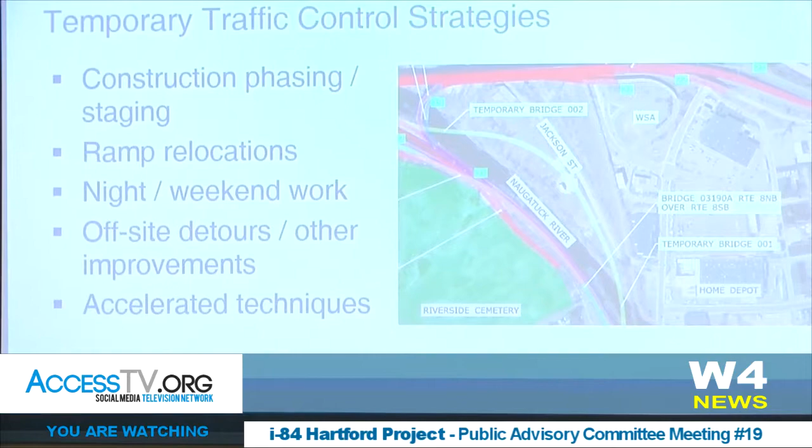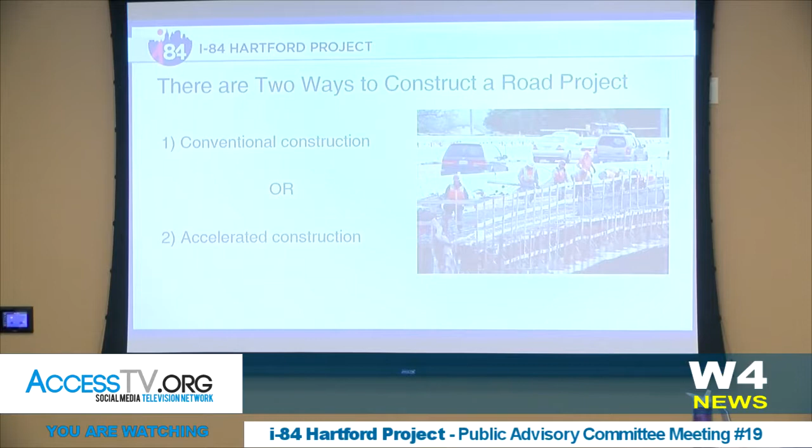And when we talk about how things are built, I'll throw out terms at you: conventional versus accelerated construction. In reality, this project will end up being built as really a mix of both. Conventional construction talks about maintaining all the lanes of traffic, moving traffic over a little bit, building a little bit more. It typically ends up with a longer duration, and can involve lots of temporary roadways or temporary structures, which can add to the construction cost.

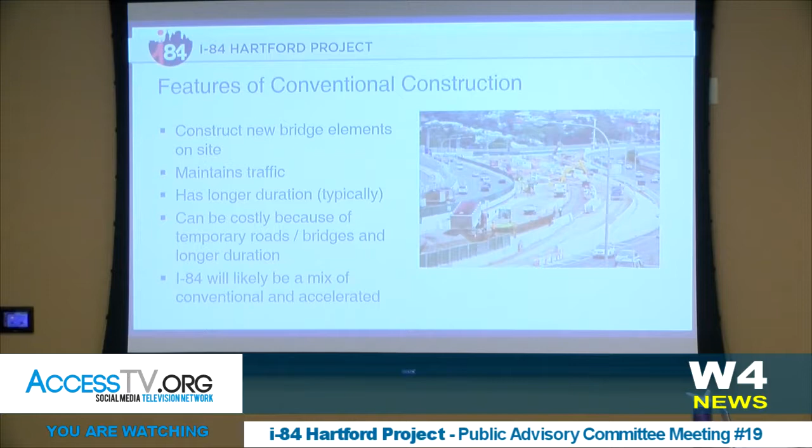Now again, I-84 will likely be a mix of that with some accelerated portions as well. There are examples of some recent significant projects around the Northeast done in that same manner - mostly conventional with some accelerated pieces. Many of you are probably familiar with the Q Bridge down in New Haven, the recently completed Waterbury widening on I-84, and of course the Central Artery, where they took down an elevated urban viaduct like we're dealing with here in Hartford.

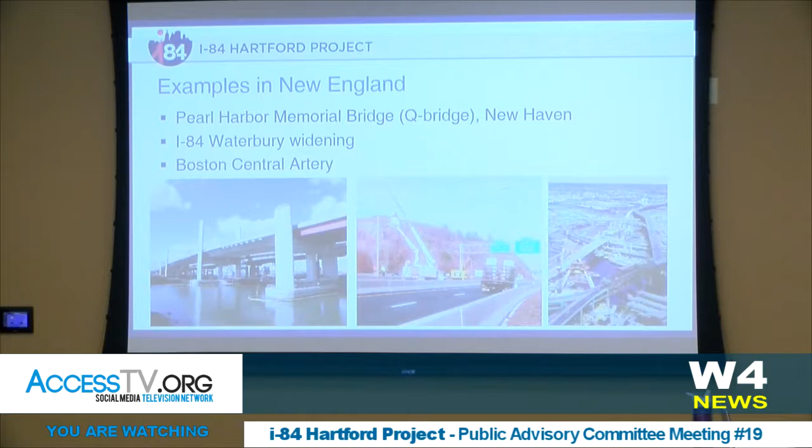So I'm going to walk through one scenario for how we could construct this lowered highway alternative we've been talking about for the last few years. It will all really start with the relocation of CTfastrak and, most importantly, the railroad - that's the thing that allows us to lower the highway to the low grade, passing beneath all those city streets.

In many places, we will utilize what we call offline construction - that's where we build the new highway outside the footprint of the existing facility. But this will have a lot of additional engineering and analysis throughout the design phase as we get towards construction. So I'm going to go to the next slide - it's a map with a lot of colors and lines. There's not a test later.

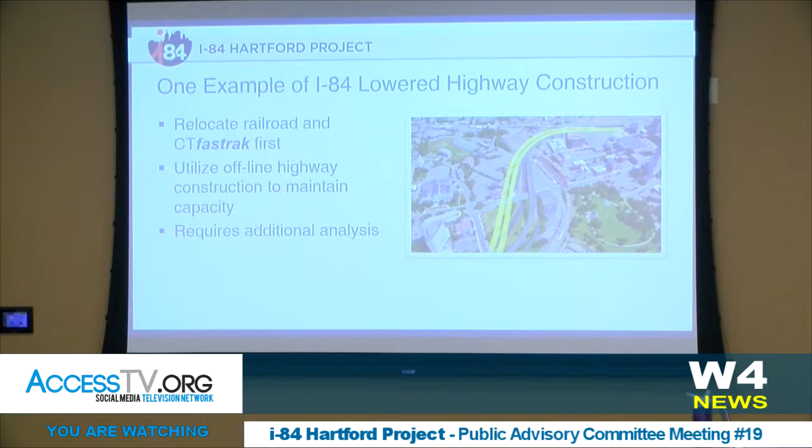So what I'm gonna do is explain the legend, but I'll pick out one key point for each phase and point you to something we think is interesting as we move through the various phases. I don't expect everyone to grasp every detail, so again, we're just highlighting here. I'm gonna pull up the laser pointer so you can see.

So that first phase is really focused on constructing the railroad, constructing CTfastrak, getting those online so that they're utilized during construction to minimize the number of single occupant vehicle trips. This phase does include some local road work and I-84 work in the eastern part of the project.

What I'm going to do for each of these is summarize at a high level the work going on, then show you where I-84 traffic would be. For this first phase, I-84 traffic would be unchanged. You would follow your way through existing I-84 eastbound, and coming away from the I-91 interchange, go under Asylum like you do today, under Broad, and come around on the viaduct. So no changes there. Where there would be a change with the construction of the railroad would be, in particular, for Capitol Avenue, a local road in the western part of the corridor.

The reason is it would be impacted by the railroad construction. So I'm going to show you a couple images just to convey why.

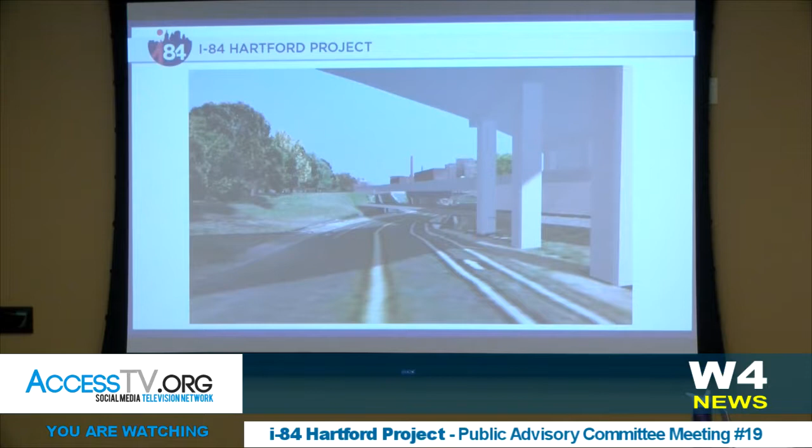So we're really talking about ensuring west to east mobility is maintained, and through these temporary roads we'd offer folks a couple different ways to get into and out of the city. There's certainly additional work to be done looking at the various intersections it impacts, but generally speaking, we're looking to provide for that capacity elsewhere as we construct these temporary roads.

So as we culminate this phase, that phase 1 we expect to take in the vicinity of about 4 years. Given the length of the railroad construction, the follow-on phases are a little shorter, comprising mostly highway work, maybe 1 to 2 construction seasons each.

So I'm going to flip back to the next stage and go back and forth once or twice to show you what we're doing. Phase 2 really focuses on constructing a big chunk of I-84 here in the western part, and then the local road network in Asylum Hill. If I flip back one more time, just to see what's going on there.

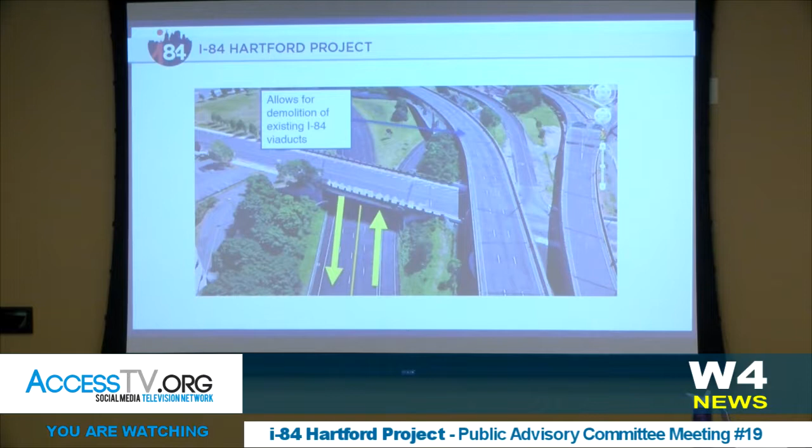The purpose for that is so we can start to demolish those big eastbound viaduct structures up here - this being the existing I-84 eastbound, and here's that off-ramp that goes to Capitol and Asylum. By demolishing those, we can start to build those new local roads in and around the Bushnell Park area.

So then we're kind of moving west, looking at this stretch really between Broad and Sigourney Streets, along with the local roads that cross in those areas. Again, you'll see as I animate this, there'll be some temporary roads in place to move the I-84 traffic out of the way so that we can build. If you keep your eye kind of here, you can see we've shifted things out of the way in order to be able to build that.

And then the last piece - that really completes the lower highway, the I-84 construction. So the final piece is ramp construction and completing Capitol Avenue and some of those local road overpasses, taking them out of their temporary detours or configurations and putting the final condition in place.

One of the things I'd point out here, and I'm going to talk a bit more about accelerated construction in the next couple slides, is that those Sigourney ramps are opportunities for us to look at accelerated construction. Right now your highways come down to Sigourney; in the future, you'll be down here coming up to Sigourney Street. Using some of these accelerated techniques will allow us to minimize any closures, whether during summer periods or over a weekend, to really expedite the time period and minimize disruption to traffic.

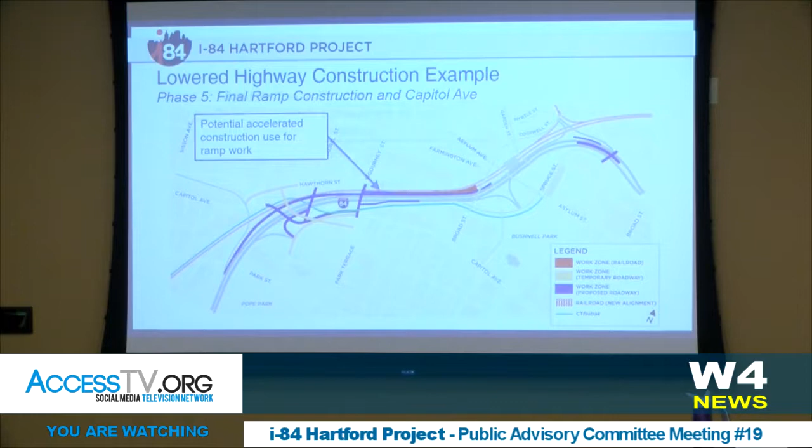So now our eastbound and westbound I-84 would be on their proposed final alignments. That'll be exciting.

So with that stage complete, we're essentially done with the construction of the lowered highway. Now what would follow would likely be some of these features that we talked about a lot. The capping would be constructed here at the end, and a potential multi-use path that essentially follows the busway on the south side of I-84 would be constructed then as well.

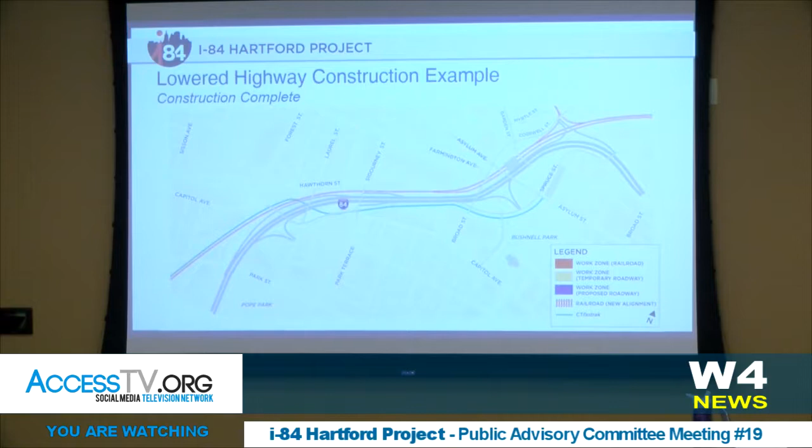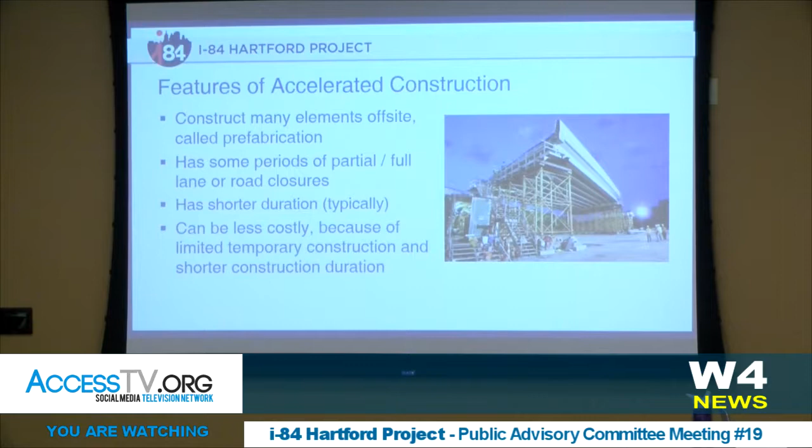Now in terms of accelerated construction, just to explain a little more for those who may not be familiar, this is where you really look to expedite the construction of certain features, including potentially partial or full road closures, to really let the contractor get in there and work a little quicker. It can be a bit less costly, but it can really help reduce the duration and the burden on the traveling public.

Some good examples here from around the state. Many of you may remember just a couple years ago they did I-84 down in Southington - that was the Marion Avenue bridge. My wife made fun of me because I went down from our house in Bristol to watch some of that.

And then there's also one going on right now, Route 1 in Stamford, as well as for those of you that drive on 91 through Rocky Hill, you'll see the bridge between exits 23 and 24.

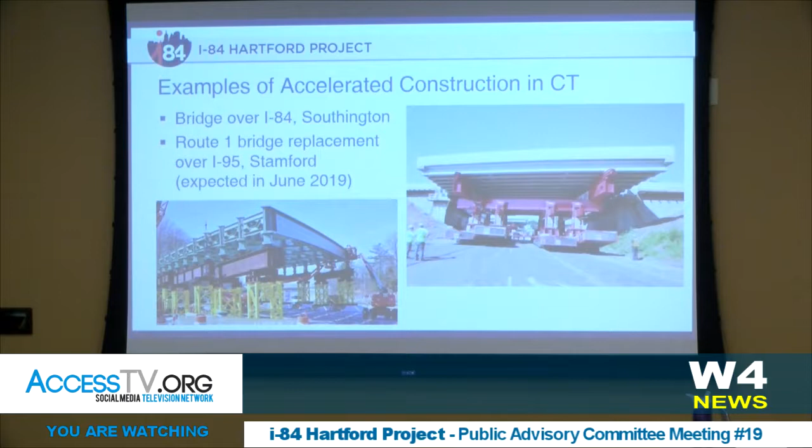So again, the summary for what I went through is really to drive home that we think we've identified a feasible, practicable way for this to be built. There's certainly still details to be worked out, and that will happen as we work with our new next generation traffic model that we've been coordinating with the city on developing. We'll use that to test these different phases and make sure we're adequately moving traffic around the city, using that mix of conventional and accelerated elements. We really feel this doesn't have to have a negative impact on the economy and the people of the city.

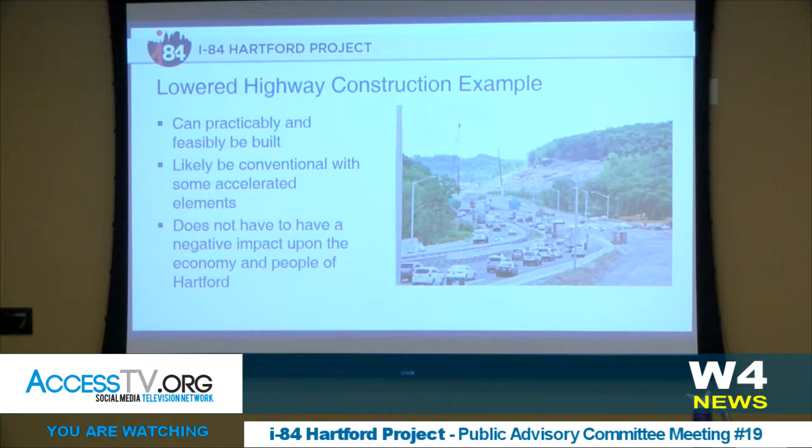To that end, we've worked with our partners at Federal Highway. Thanks again, Ted, for providing these. We have just a couple examples, and I think you guys have the printouts with all these links, so I won't go into every single case study we've done.

Just one good example of something that can come positively out of these projects is the I-80, the west approach of the Bay Bridge out in San Francisco. They did a big seismic refit and essentially had to reconstruct the whole thing in the aftermath of the Loma Prieta earthquake. That carried about 280,000 vehicles, well above what we did. They rebuilt it in place over the course of about 6 years, and one of the big successful results was the number of minority and women-owned small business enterprises that came up.

For such a big contract, all these federal aid contracts require a significant DBE presence. This really enabled several successful firms to start up and carry on, and they're still successful today. So that's just one example of how this can be a positive impact on the economy, and that's just a set of newsletters from their project.

So I talked a lot there about temporary traffic control. That was just one of the family of strategies. The other one is transportation operations — looking at the broader transportation system and how you can improve other modes, how you can ensure there are other ways for people to make that same trip, or whether they even have to make it at all. I'll talk a bit about transit on the next slide.

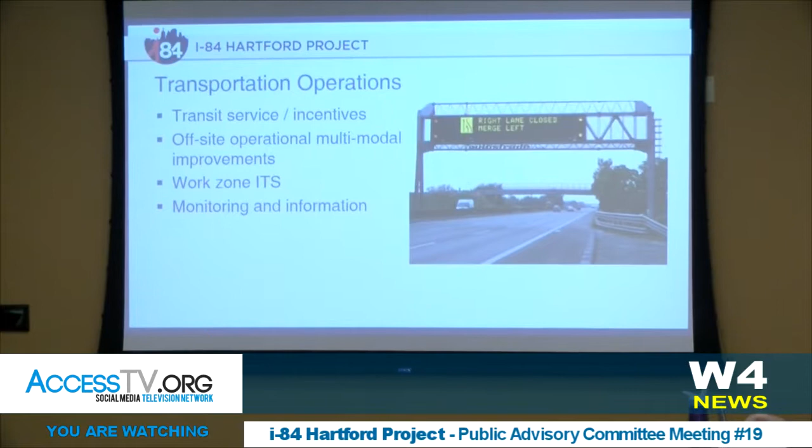It involves communicating through the DOT's Transportation Demand Management Center, understanding where the delays are and getting that out there, along with other options for people to take. One of the big points of having that first phase include the railroad and the CTfastrak construction is to make sure they're open during the highway work, so people have an option to take another way into the city to come to work.

Certainly a lot of other municipalities or states have looked at potential fare reductions. That's something we'll consider here too. And then there's promotion — making sure people understand that these opportunities are all out there.

Unfortunately, this video, which I tested about 10 times back at the office and 5 times at DOT, does not appear to work here, but take my word for it — it's from the Q Bridge project. Basically, when they had a major traffic shift, they would publish a short video on their website showing you how to drive that new transition.

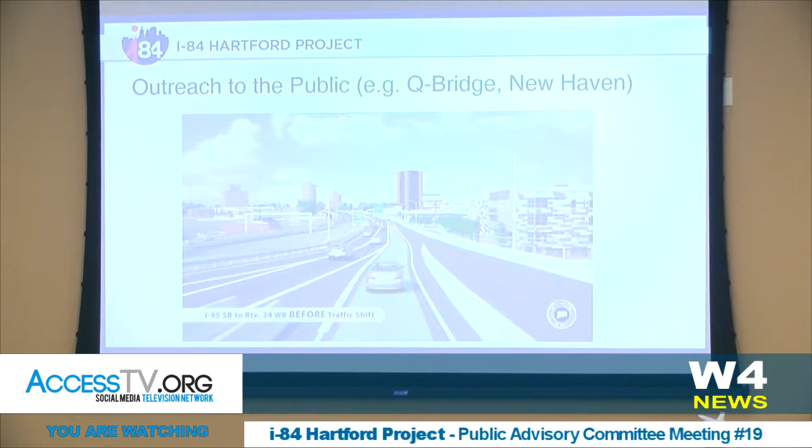For example, this was for drivers going on I-95 southbound, getting off onto Route 34 — something they were used to doing a certain way for many years. This was published well before that traffic shift took place, so people could envision what would happen under the new scenario.

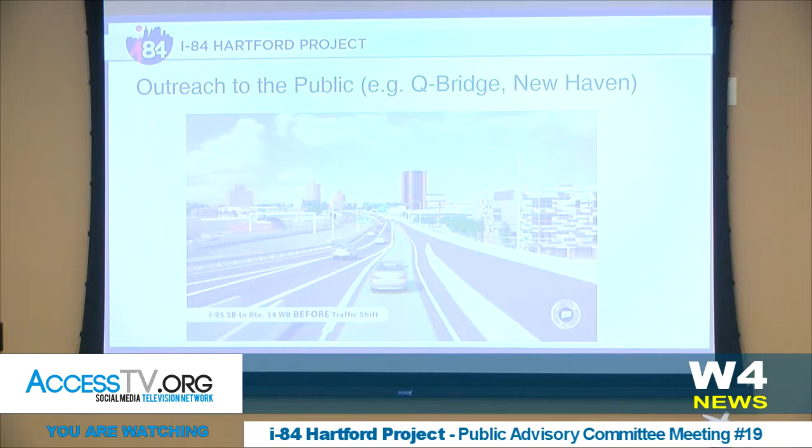That's part of the broader family of tools focused on public outreach. This ensures that the general public, as well as specific motorists, understand the options we just talked about in the last two strategies, and how they can use them. That includes press, media, especially today social media, and communicating traffic shifts well in advance so people understand them. Any temporary closures would also be well communicated to ensure folks understand what's happening.

I'm sure the set of tools we'll have at our disposal will be different from a technology perspective than we have today.

We will make a pledge to stay up on best practices and adhere to what the best tools of the day are. And again, promotion of other modes, like I talked about on transit, will be really important in minimizing the number of trips. And then coordinating with the major employers and key stakeholders, the folks who know the people coming into the city and where they're coming from, making sure we work with them to help understand how we can get folks in and out in the most efficient manner.

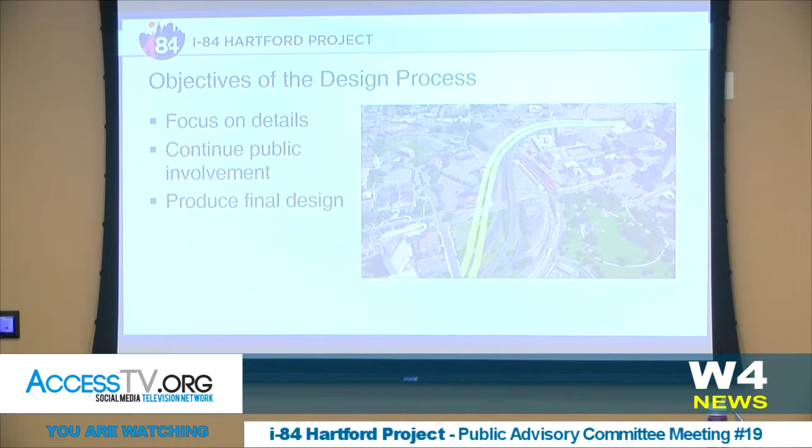So with that, I think I'm going to turn it over to Kevin to talk about next steps, unless anybody has any questions.

As Christine said, we're at a point where we're kind of in a production phase of the EIS, and we've had these many years of working towards getting the input and doing the analysis, and a lot of it is now in the production mode.

But while we do that, there are ways that the public stays involved - we're going to continue providing information through our e-bulletins and newsletters. And then as we go through and publish the DEIS, that's the opportunity for review and for the public to attend the hearing and go through the process that they talked about.

And just to reinforce, she identified the different stages of this environmental process, and that the public involvement process will continue as we take these details into design. And with that, if there's any questions - if not, we'll look to go on to the city.

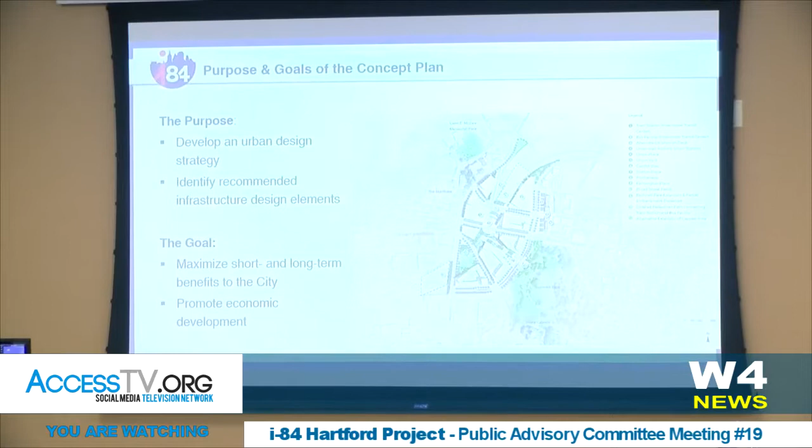So really the purpose of this effort was for us to develop an urban design strategy, and also identify recommended infrastructure elements for I-84 and beyond. The goal is really to maximize the benefits to the city of Hartford - promoting economic development, situating ourselves so that this project gives a good return, capitalizing on the investment being made in 84 to really knit the city back together in this area, ending with a large benefit for the city of Hartford.

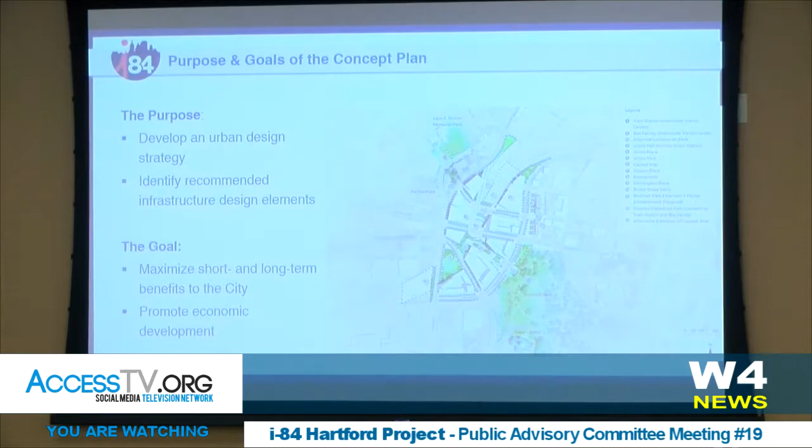The consultant who assisted us in this work is WSP, formerly Parsons Brinckerhoff, and if you've been coming to all these meetings, you've heard them speak at a couple of the meetings. So there were a couple different elements of the work that they did.

One big piece of it was peer review, looking at the work that was coming out of the I-84 work, but obviously that work is being done for the state DOT, and the interests and goals of the state DOT are a little different than the city's. So this gave us an opportunity to look at everything with that different viewpoint through the expertise of the consultant. We were looking at where the ramps were located, local access, the intermodal transit center location, and how we can put all this together to improve placemaking.

We worked with the DOT team throughout the project and came up with this Capital Gateway concept plan, which I can send as a link to DOT that can be sent out to the PAC. It has several elements to it: strategies for what we wanted to see happen there, infrastructure recommendations, design guidelines, and financing and implementation strategies. So I'll talk generally about how all those elements have come together to create this Capital Gateway plan.

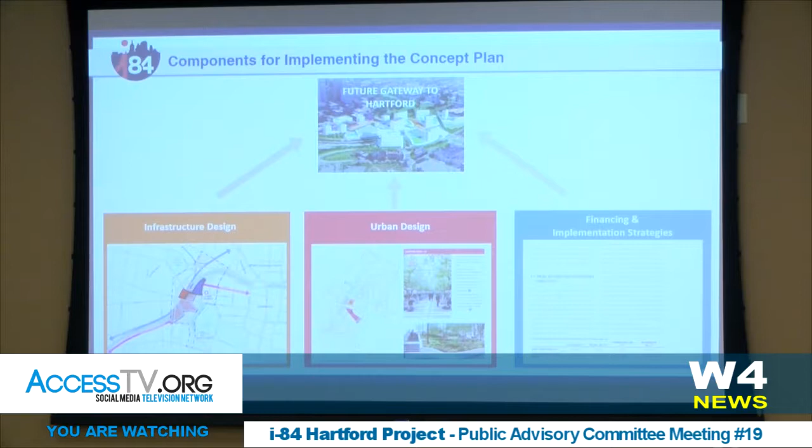In terms of infrastructure design, there have been three different elements: what do we want the urban street network to look like in this vicinity, where should the intermodal transit center be, and how do we make that CTfastrak connection? These to us were all the key elements in this central area. We're really talking from about Broad Street to north of the proposed bus center as the area of the Capital Gateway, as we've defined it.

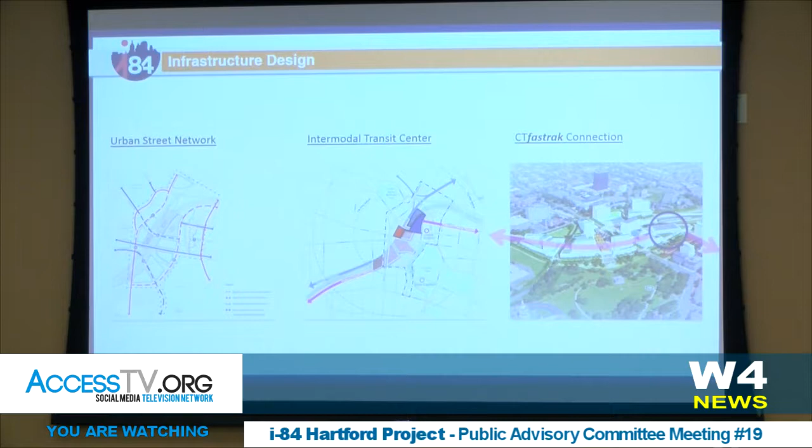So in terms of the urban street network, some of the things that came out of the peer review that we think have improved the overall project for all parties: number one, to extend Garden Street. If you remember, there was a time where a Garden Street extension was not included as part of the project. Our consultants were able to assist with figuring out how the grades would work and how that could work to the benefit of the project.

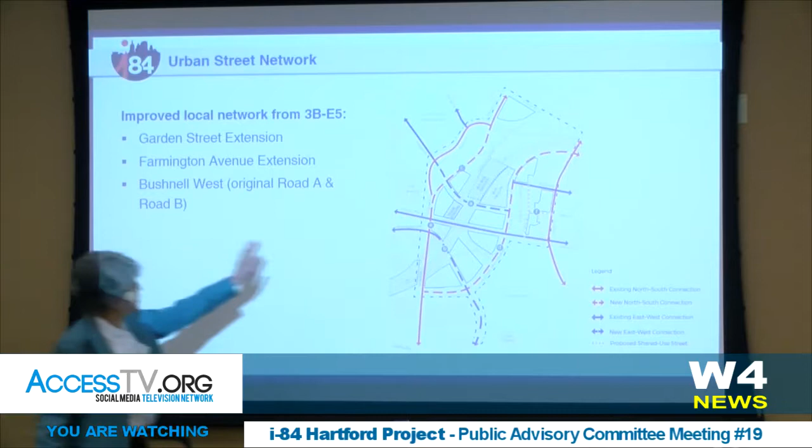We've also identified the importance of a Farmington Avenue extension, which you can see. I don't like having two screens because I like to point to the screen. Farmington Avenue, rather than intersecting with Asylum, turns south and connects with the new roadway along the edge of Bushnell Park.

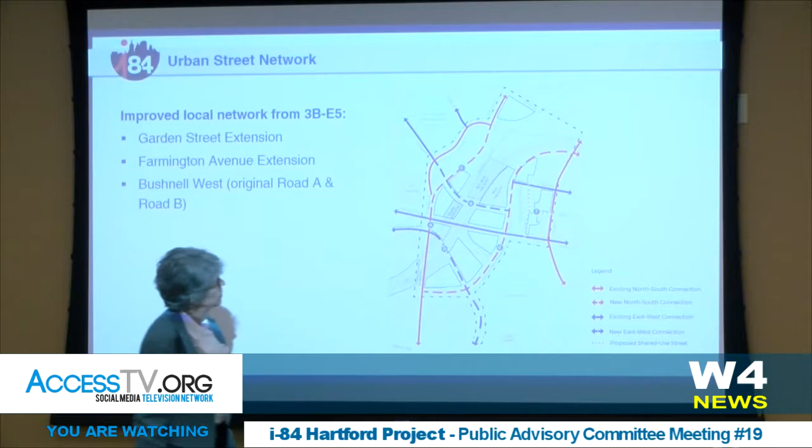We think that's important to improve the developability of some of the ground that's made available as part of the project. And then Bushnell West had been called Road A and Road B - they were two separate roads. Now it's one road that makes close to a 90-degree turn there.

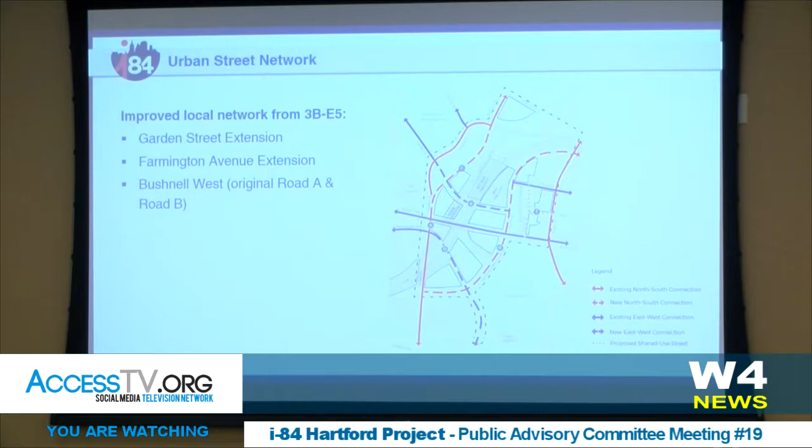Can everybody tell what I'm talking about? Should I use the laser pointer? I'm not good with laser pointers, that's why I'm hesitating to do that. You can tell? Okay.

What's really key with this whole idea is these two facilities need to work as one, as an intermodal center. We've had for a number of years the train facility and the bus facility coincident, and we don't want to lose that value. We know that a lot of people value that - it makes it a more powerful connection.

So the pedestrian connection that we make along Garden Street between these two is going to be very important. We want it to feel like when somebody comes to the bus center, they've arrived at the intermodal center - they're just walking down a corridor to get to the trains and vice versa. It's the kind of distances you walk in other train stations, that you walk in an airport all the time, and we think that it is workable to have it designed in that way.

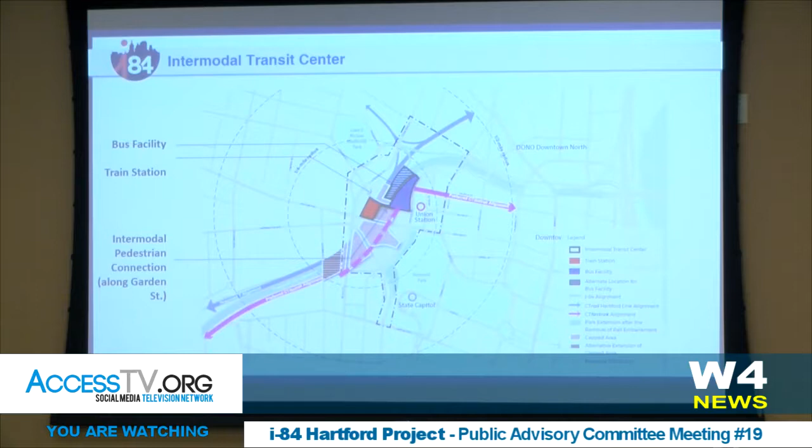CTfastrak is really essential to the intermodal facility. We believe it must connect to the intermodal facility. It seems most feasible for it to connect to the bus facility, making all the transfers at that location, making it very convenient for people to go from the busway to the train and vice versa. So we are showing the busway coming underground into that bus station and then continuing downtown along Church Street. DOT has shown other options for the busway, but we believe this one will work most effectively for the transit service and will be most beneficial to the Capitol Gateway.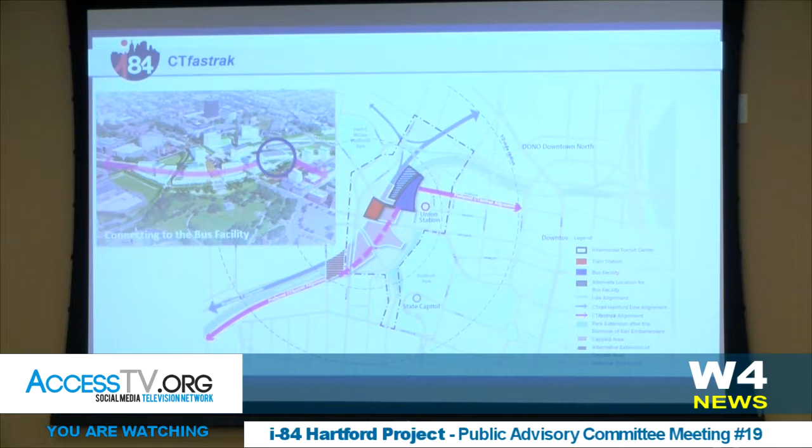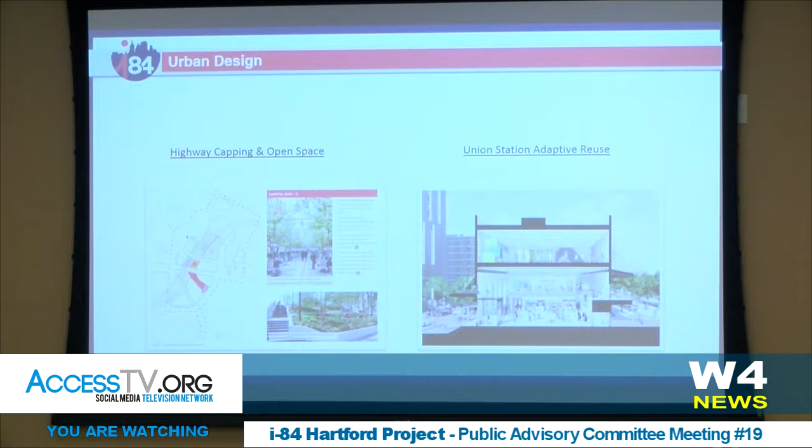The next couple of things we looked at in terms of urban design were related to highway capping and open space, and then the adaptive reuse of Union Station.

In terms of capping considerations, we wanted to mitigate noise and visual impacts. We did not want to build a lot of buildings on the cap because we know how difficult and expensive that is. But we wanted to use the capping to attract Class A type development in the terra firma on-ground locations where development could be supported. With just one exception, right across Asylum Street from Union Station, we would not propose any building on the cap. At that location, we think it's important that there be some type of building there. It's a key gateway into downtown.

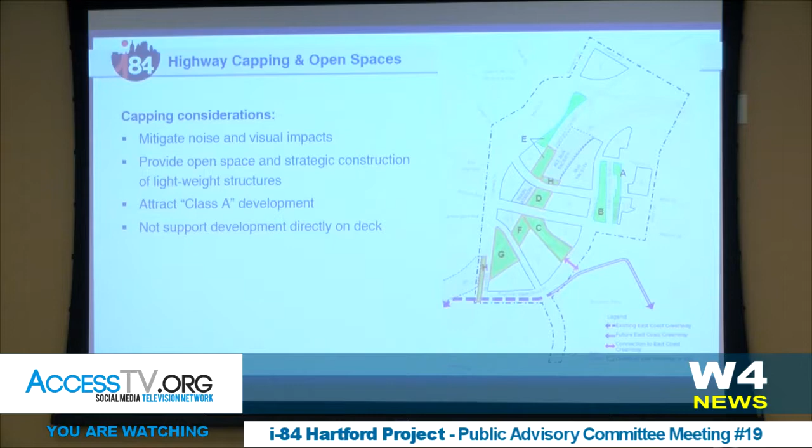So I'm going to go through the variety of different open spaces. I'll go over it pretty quickly, but just to show you some of the thinking behind the open spaces.

So this red shaded area is what's being called Capitol Way, Area C. That would be built over top of those ramps that are exiting from the highway, and they exit right opposite of Bushnell Park. So it's important to mitigate the noise and the visual impact of those ramps. You can see Area 5 and 6 to either side of that. Those are really premier locations for redevelopment potentially to take place, and this will help to give that a better chance.

What we also are proposing is that the wall, the brownstone wall at the park, would stay in place opposite these ramps. It's very important that we have that sort of sheltering of the headlights coming off the highway into the park. But we expect that most of the brownstone wall and the viaduct will be removed as part of the project, not being necessary, and actually opening up this space into Bushnell Park. The view into Bushnell Park will be really important. If we have Capitol Way just sitting up on an elevation separated by a wall from the park, it's a very different concept than Bushnell Park North and how that integrates so well with the park.

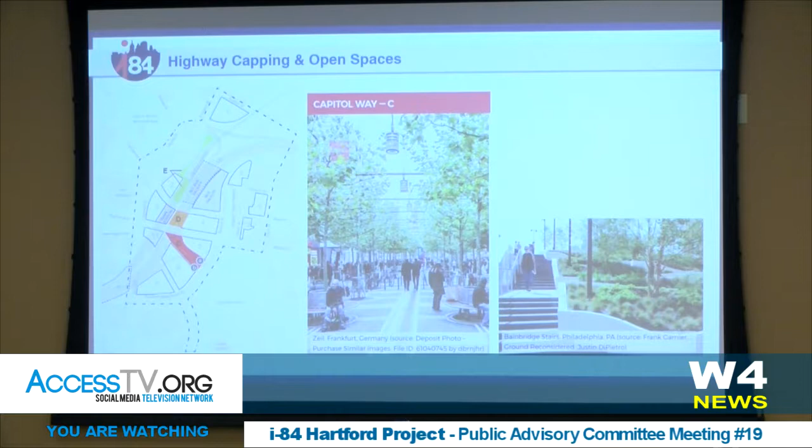The next capping that I'm showing you here are some concepts for what's called Station Place. This is just to the east of the new train station, north of Asylum Street, and it's important to have a plaza in this location, really the front door to the station, making the station part of the community.

The next area is what's called the promenade, these green areas labeled E, and this ties the whole development up into the Asylum Hill area. It's more of a promenade than a park, and ties that area into the train station also.

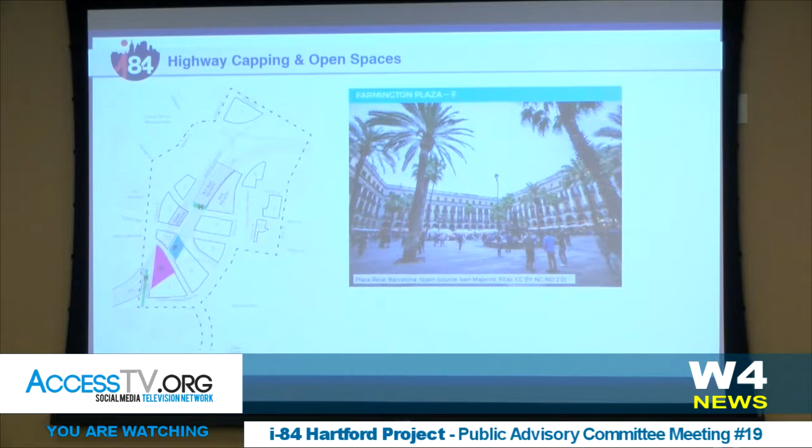The next area is what we're calling Farmington Plaza, Area F. That is over the highway. It's designed to be an active plaza. And then finally, we have an area called Broad Street Fields, Area G. It would be a large expanse of open space, and the idea would be that it would need to be activated with some type of athletic use.

And then we're showing Area H, a planted buffer along Broad Street. However, one of the changes that the P&Z Commission asked that we add to this plan is the idea that the capping over 84 continue to the west side of Flower Street. That's what that dashed line is showing off to the very western edge of this drawing, over top of the lowered highway.

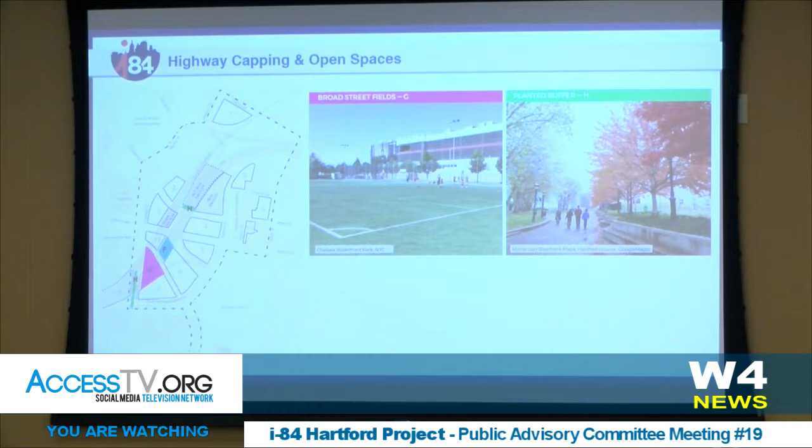Finally, Union Station adaptive reuse. We want to see this be a 24/7 kind of area with flexible space for public programs, restaurants, classrooms, studios, exhibit space, and small-scale office.

The way this works with the surrounding streets, we're looking at Union Place becoming a shared street on that side of the station, and on the Spruce Street side there's now a larger expanse of ground since the buses are no longer there, and the elevations have changed so we'll be level coming into the Great Hall.

This concept shows the modern addition to Union Station removed, and rather than stairs up into the Great Hall, because of the elevation change with Spruce Street coming down, we'll be able to access directly into the Great Hall, creating a space called Union Yard on the west side of the station.

And I have to confess, usually it's landscape architects and economic development people who make this presentation, so an engineer doesn't quite have the same flair with the material.

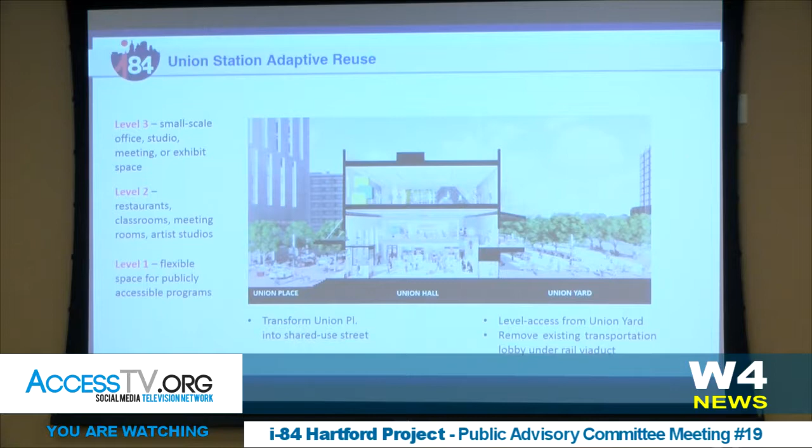Looking at financing and implementation strategies, this kind of project would need to be supported. If we look at what we're projecting in terms of development proposals, this would require Hartford growing at a significantly faster pace than it has to this point. But we think there are opportunities to leverage the insurance cluster we already have and the Innovation Place efforts underway to move it forward.

But it's not a done deal that the city could see all this development take place. I'll show you some concepts.

We'd like to look at our zoning and see how we can optimize our TOD overlay zones. The improved train station and bringing all the transit together will help provide greater impetus for TOD, and we're already getting questions from people who own property within a half mile of the proposed train station.

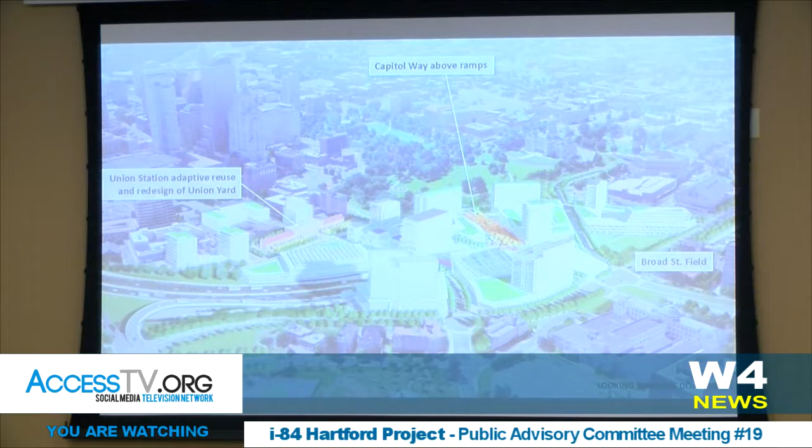From here you can see the Capitol Way open space over the ramps and the Broad Street field, which would be the large open space piece.

Finally, if you look at this drawing, it gives us a lot of opportunities. If you look at the depiction on the left and go south of our area of interest, opposite Bushnell Park behind the LOB parking garage, it looks like there are more opportunities to create greater place over there, in what's just the back door right now.

The back side of the LOB parking garage also offers a place where we can continue this concept. I want to thank Bill McCarskey for pointing that out and sharing some drawings along those lines to get us thinking about that. So that is the end of our presentation.

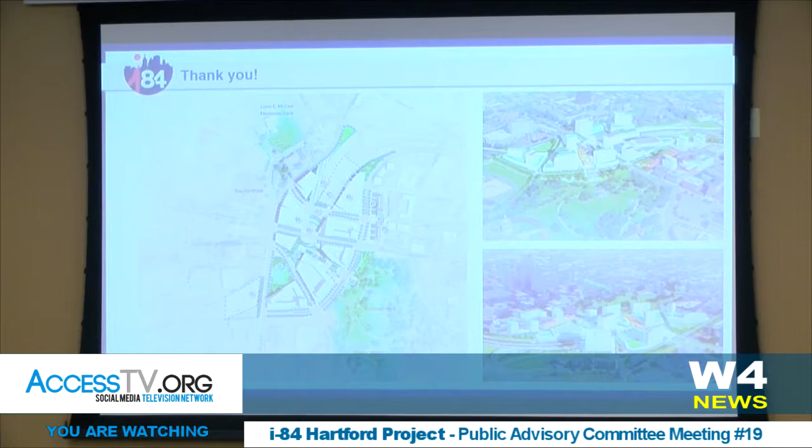Like I said, we'll send some information so you can take a look at the report itself if you're interested and dig deeper.

Does this have to be formally accepted by the DOT? That would be a question for the DOT. I think City Council is going to be adopting it at their next council meeting. It's slated to be adopted.

So to answer that and all of this that's gone on with what the city's doing and what other input we've gotten from stakeholders, that's part of what we're considering and incorporating into the DEIS as far as any other stakeholder input. I don't know, is there anything else? That's pretty much how we're looking at this plan. It's not something that's going to be looked at separately. It's part of the whole alternative analysis and environmental impact process.

So the land that's created above or on the caps, will that be owned by the city of Hartford or owned by the state? Again, what happens with capping, there's a lot of things to be done. We're not at that point in this process. We're looking at the impacts when it gets into design, and we see how things flesh out, and ownership and stuff could flesh out down the road. That's not at the point we're at.